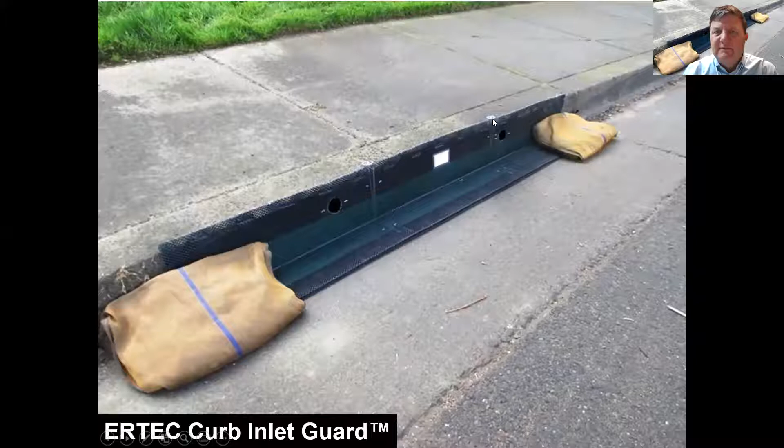Standard installation is going to be 2 gravel bags, and in some scenarios contractors are using adhesive underneath instead, without the gravel bags. The gravel bags have become, around the country, quite an eyesore and a troublesome device because vehicles will drive over them and damage them, and then there's rock all over the place. The 2 holes here are designed for our bypass.

The opening is 1/4 inch. The filter inside, which is the dark part - you can kind of see it's darker - that is 425 microns. All of our products are made out of high density polyethylene, so all your local Coke bottles and milk bottles.

But these can also be overlapped, so if it's a longer curb opening - for example, in Georgia they have much longer curb openings - these can be overlapped. In some scenarios, for example in Arizona, I had a curb opening of 25 feet, so they used about 6 of these. So you can certainly overlap these, and contractors love these because they can put them down and then just stack them right back into their vehicle.

So we can do these in a bundle - a standard bundle is about 25 of these. That's where contractors love the ability to just throw these in the back of their truck and keep moving.

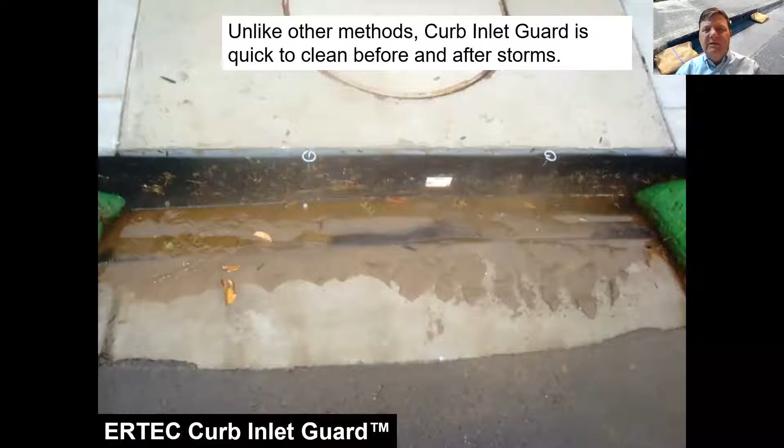Okay, here's the stuff here. This is kind of how it looks in action, if you will. They do have the gravel bags - you'll see everything is collected there. From a maintenance standpoint, we do tell people you want to clean these out, using a flat shovel, a broom, anything like that. Some contractors will take these off, crack them on the ground, clean everything up a little bit, and then put them back in place. So you have quite a few different options for maintenance on these guys.

Now we move into our combo guards - again, a grate in front of a curb opening. We have a variety of sizes for these, everything from 28 by 22s all the way up to 48 by 30s. We can accommodate pretty much every grate in the country with the combo guards and the grate guards, and we can also do custom. We have a contractor in New Mexico who has some really, really big grates - we've gone all the way up to 60 by 60. Now we try to control that a little bit because we don't want it to be bigger than a pallet.

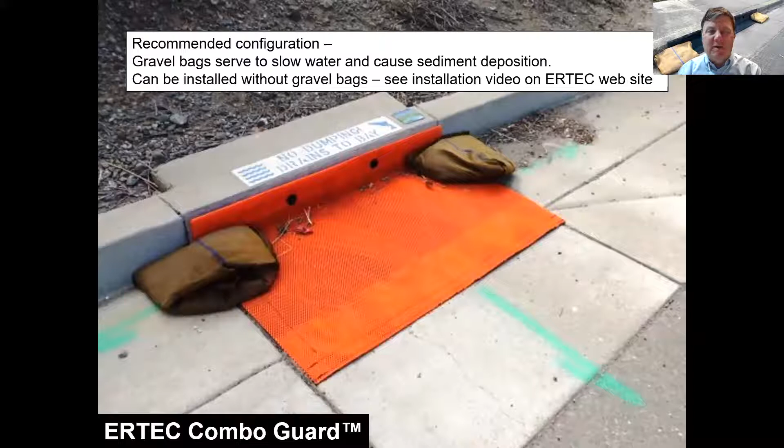Okay, and again, here's the standard installation of a combo guard. You'll see that the filter, the dark part, which is right there - everything from this point forward is open. There's no filter there, and we use that as the bypass, so you have your bypass holes here. This lip is 6 inches tall, and we want to limit the amount of water that's going to sit there, so we want the water to flow. Typical water is going to come this way, not always this way, so we use this as our bypass.

There's a metal rod right here, and that will hold it down a little bit. A lot of contractors now are getting rid of the gravel bags and using adhesive around the edges, and they're going to use rebar tie wire in 4 spots to hold it in place.

Again, from a maintenance standpoint, you are just moving the gravel bags, taking a broom or a shovel or rake, cleaning off the debris, allowing the flow to continue. There's no pooling, no ponding, unless, maintenance is such an important factor in your erosion sediment control. We see horror stories all over the country, I'm sure everybody does, where people just put stuff down and walk away, and then it's just a mess after that.

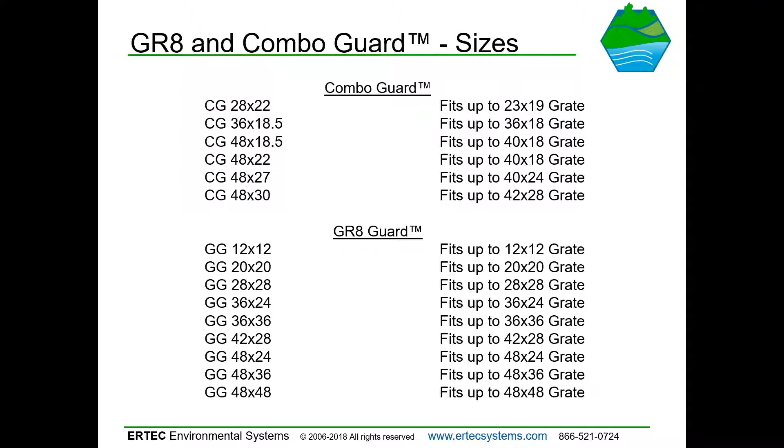Is there a cost difference for orange or black guards? No, but there's a time window. It typically takes us an extra 48 hours to do the black, because our production is orange, so it takes a little time to pull people off those orange ones and move them over to black. But there's no extra cost at all.

Okay, let's move on. This is another product of ours, called our drop guard. Our drop guard is designed for field inlets, unpaved field inlets. Most unpaved field inlets will have a concrete curb around them. This is designed in place of silt fence.

A lot of times people will just put down silt fence around it. We've all experienced the problems with silt fence, where a little wind picks up, a tree or something falls on it, and now it's down on the ground and not really doing its job. With our drop inlet guard, you're able to wood stake it down, and the air and water will flow through our device as opposed to knocking it over.

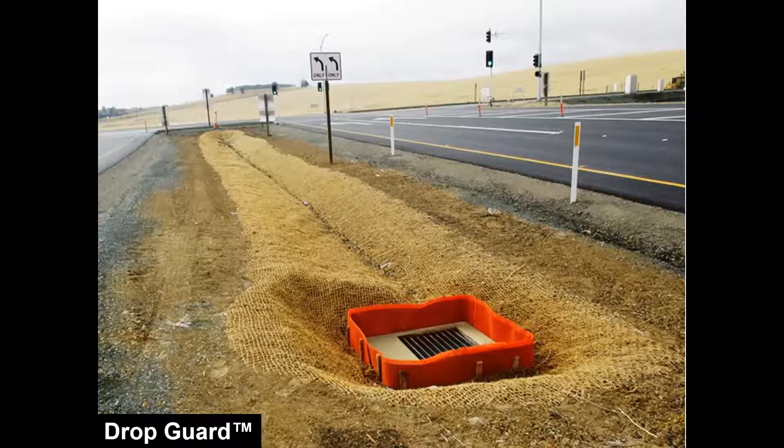Have all these products been approved as alternative BMPs in the state of Georgia? Not in the state of Georgia. The situation is that we have to have our products on a plan, on an upcoming project, prior to construction. Once it's on construction and on the plans, Georgia Soil and Water Commission will go out and review it and test it on site.

Typically, in every surrounding state, it's been submitted. We have conditional approvals in various states in your neck of the woods. I'm out here in California, and all of our products are approved with the California Department of Transportation. We have Nebraska, Iowa, Minnesota, South Dakota, Texas, Florida, North Carolina, Virginia. But yes, they're all in the process, put it that way. So if anybody knows an engineering firm that would like to help me with this, I'd love to connect with you guys.

The other product here is our Slot Guard. This is designed for slot drains. It's become extremely popular because there's not a whole lot of other alternatives out there for slot drains in construction projects. We've noticed that a lot of airport projects are speccing ERTEC Slot Guard for runways. When they're redoing the runways, they have nothing else to cover it. Filter fabric, when they put that down, just gets destroyed and falls apart.

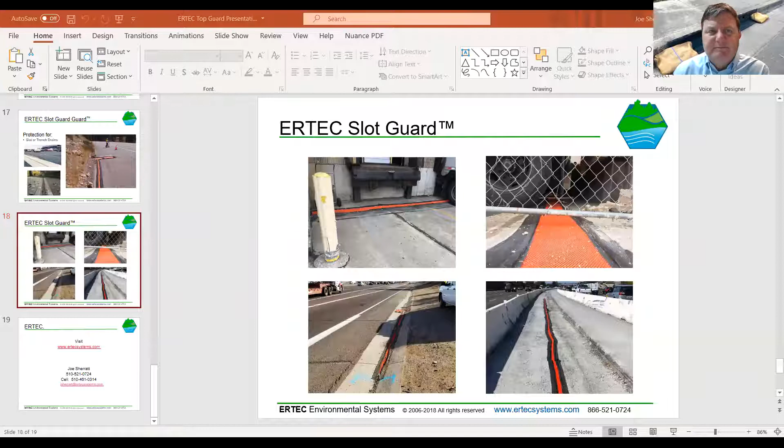I can always send you guys out some samples if anybody's looking at something like this. But this is a great alternative to a straw wattle. It still allows the water to flow through while keeping all the debris and sediment out of your yard, especially in industrial sites.

Okay, I'm gonna message you my email if you could send me some information on that product. Thank you. Okay, that'd be great. And that's Ashley? Yes. Okay, perfect.

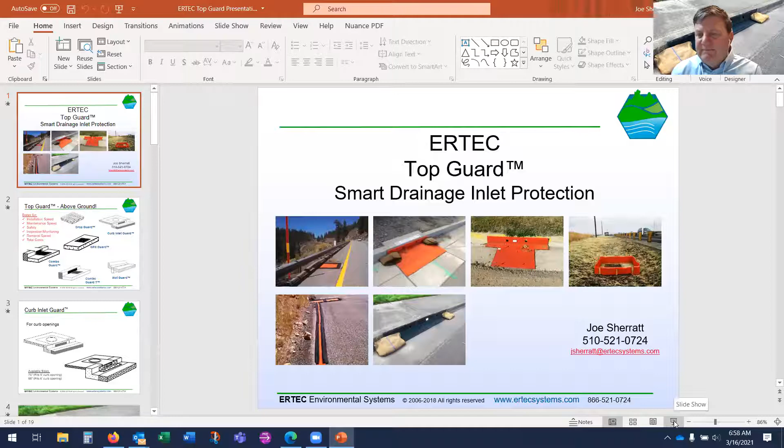Joe, you're still available for questions, correct? I'll be available for questions for a half hour. Okay.

Hey, Joe. Yes, sir. Hey, you mentioned that your grate guards are load rated. Yes. Okay, what type of loads? I know you showed them on the side of a highway. They're rated for even tractor trailer loads.

Yes. The only challenge we face sometimes is there'll be a situation where there might be a grate where heavy traffic, especially larger dump trucks or heavy vehicles, will be turning. So if their wheels happen to be turning right on it, that sometimes is a little bit of a challenge for us. But there was a pretty major project in Arizona, and they used our grate guards right outside of the yard where all of their material was loading, and so they were driving over them nonstop. We had no problem with that.

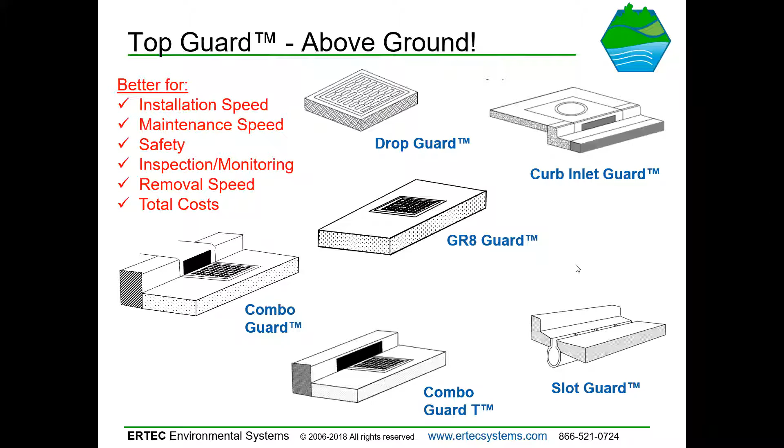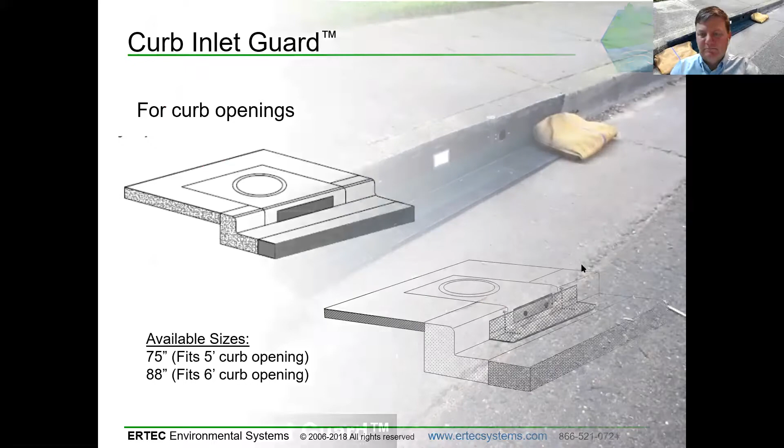Can you provide your direct email? Yeah, let's see. Not that one. So here's all my contact information. I can go all the way to the, might be easier the last one.

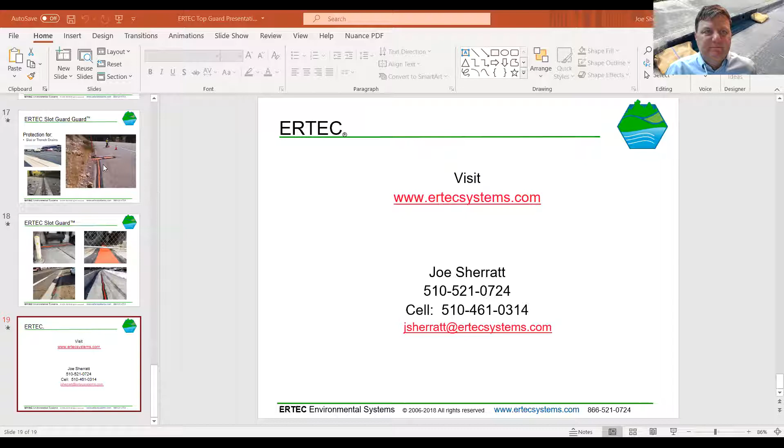So if anybody has any questions or they'd like any information sent to them or samples or anything like that, I can shoot that over to you. So what's everybody using now for recommended inlet protection? Is anybody-

I didn't quite get that email address. Oh, okay. Ashley, what is your email address? It's A Taylor. And I did direct message it via the chat. Oh, you did? Okay, so let me check. Let me make sure I get there here.

Ah, got it. Okay. And I'm most interested in the grate guards and that last product, that perimeter product, the hard surface guard, for an industrial application. So if you could just shoot me an email, I'll be in touch regarding that. Okay, perfect. All right, thank you. Thank you.

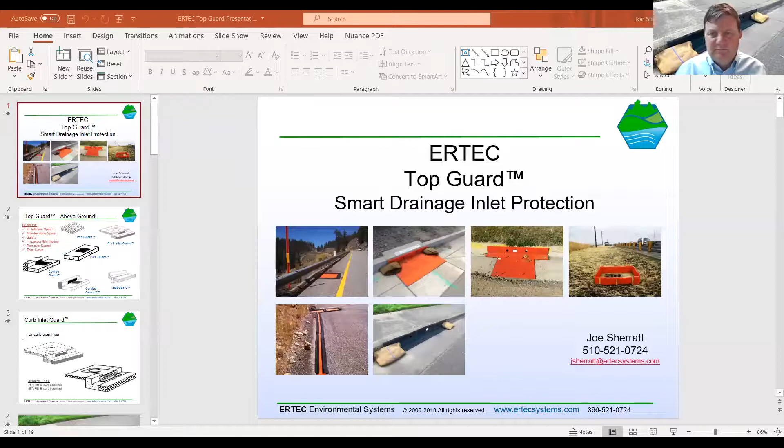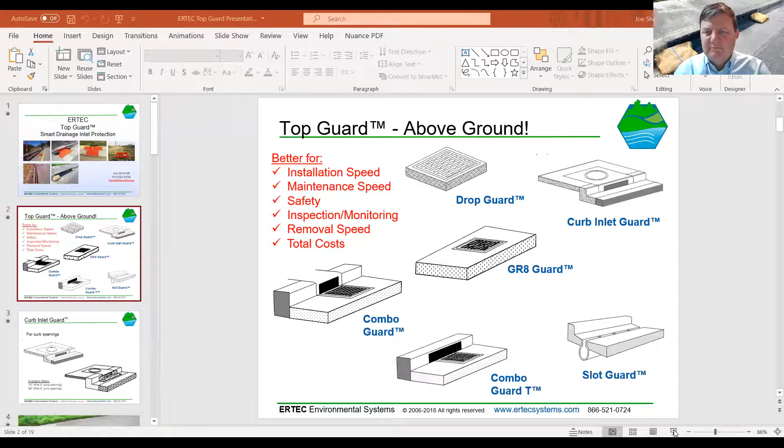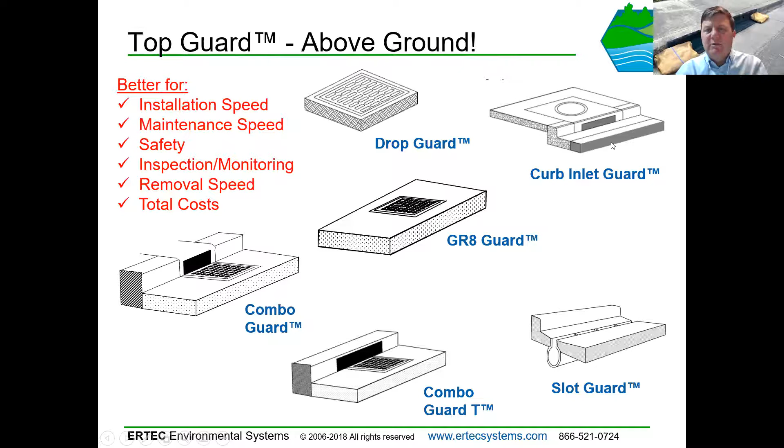Why are we doing the loop? So we have a variety of... let me get onto the other screen here. This one's that's the better one. Variety of different applications, everything from a flat grate to a combination of grate and curb opening. Slot drain, always an interesting one to try to cover that. We're back onto the loop, I apologize.

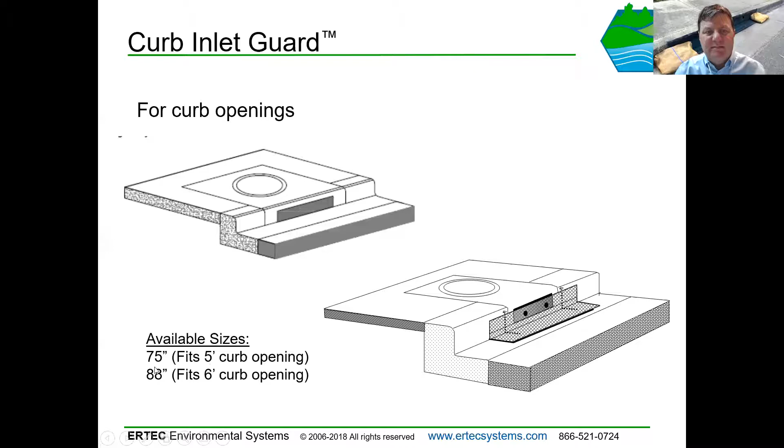This is our curb opening. This is our curb inlet guard, 75 inches long, 6 inches tall. What we have is we've got some pins that will hold on top. They adjust based upon the height of the curb. Standard installation is going to be with gravel bags. A lot more people are using adhesive in place of the gravel bag because of the challenges faced with the gravel bags, getting run over and damaged.

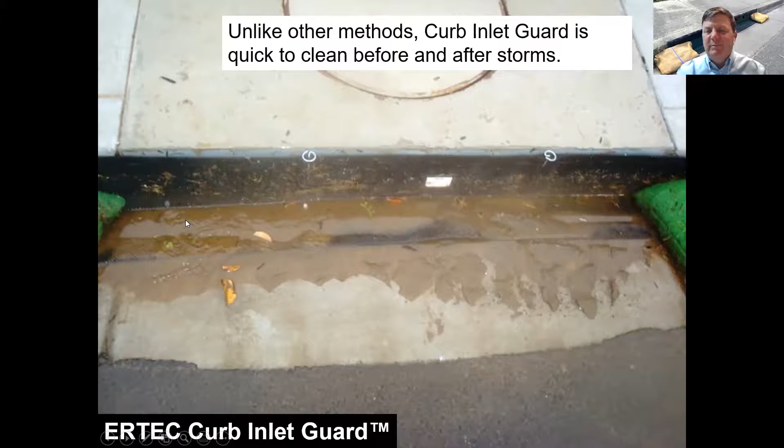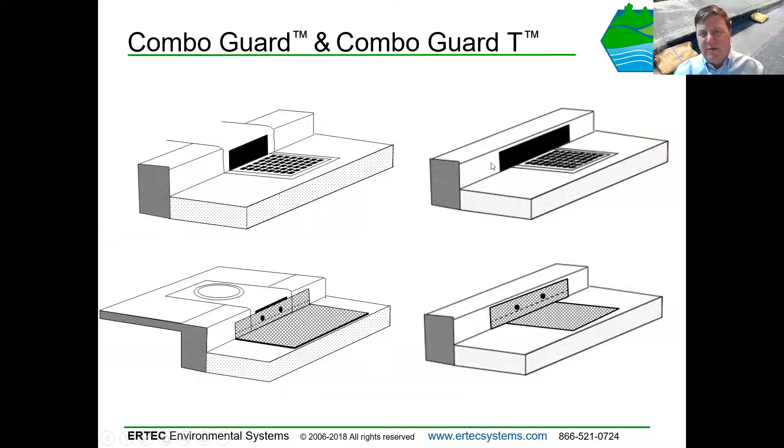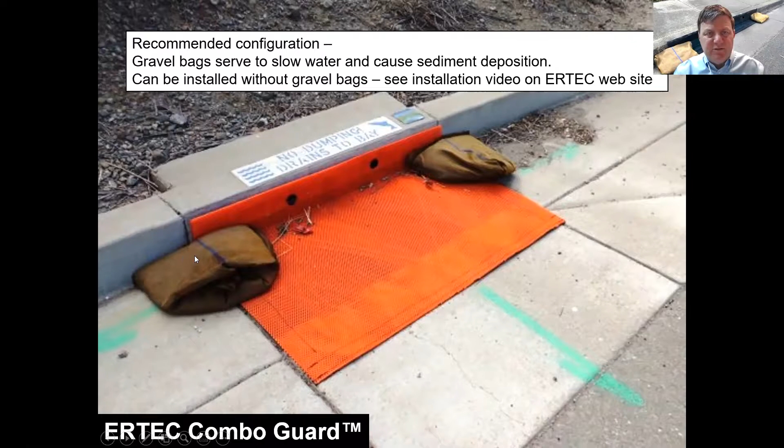Now we move on to our combo guards, which would be a grate and curb opening. In some parts of the country, the curb opening is much bigger, so we have our bypass holes here. We have our filter, as you can see the dark sections here. Our bypass is also here. Installation is going to be with 2 gravel bags. Here's an example of a completely messy one, but again, it will be very easy to clean for one person. One person will be able to roll through there with a flat shovel or a broom and clean all of this up, and you will not have to lift up a grate once.

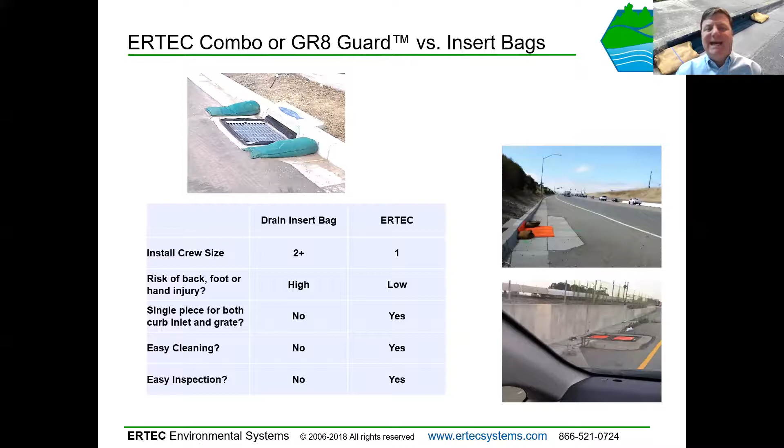Some of the challenges that you face with a traditional bag: typically it's like 2 people, risk is very high, and the reusability factor is very low. All of our products are reusable, so you'll be able to reuse all of these.

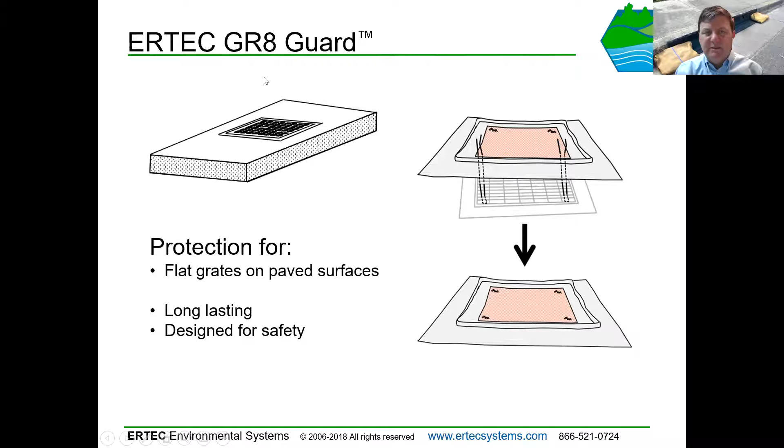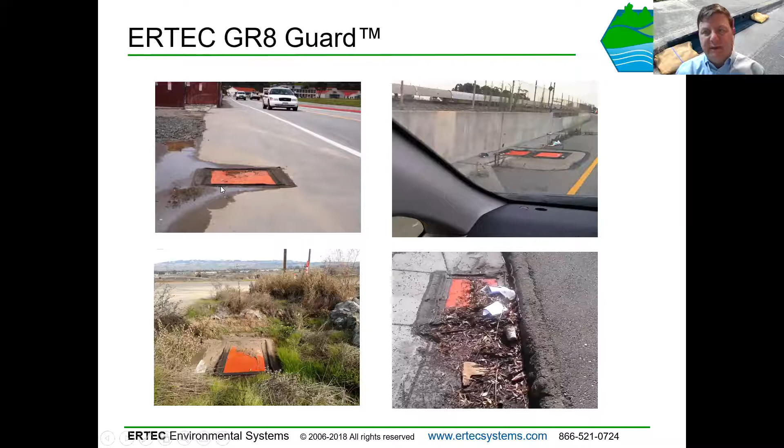Here's our GR8 Guard, flat grates, with a variety of different sizes available. Typical installation uses rebar tie wire on all 4 corners. In high traffic, high flow areas, we like to use adhesive to hold it down a little better. We do get some air bursts, especially on the sides of highways.

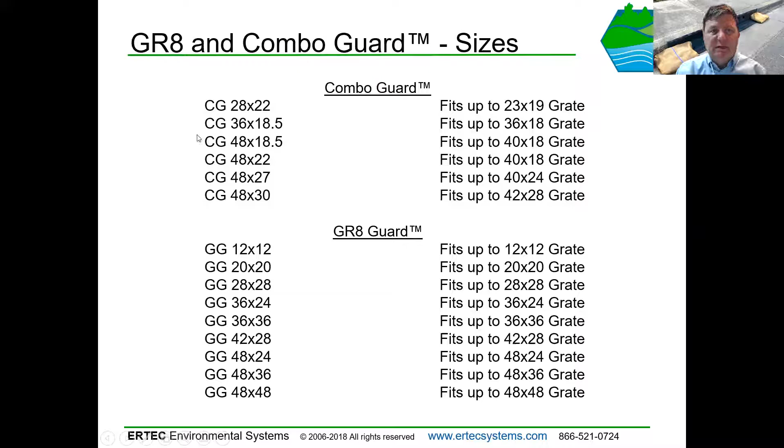As you can see, there's a variety of sizes available. We can also do custom sizes, and we can also do these in black. Some of the business parks prefer black. This is our drop inlet.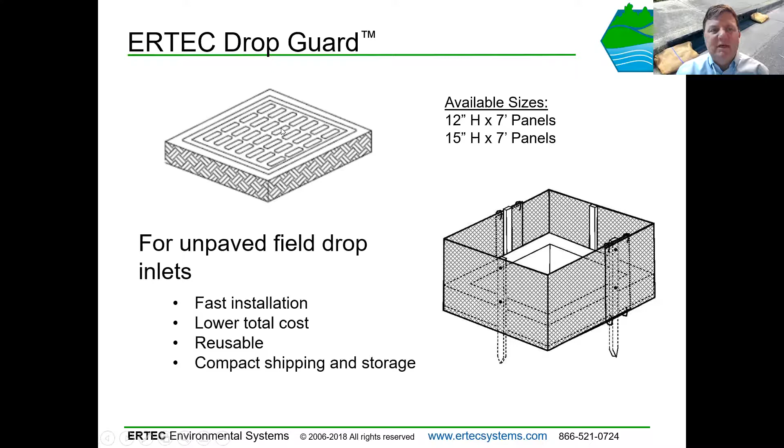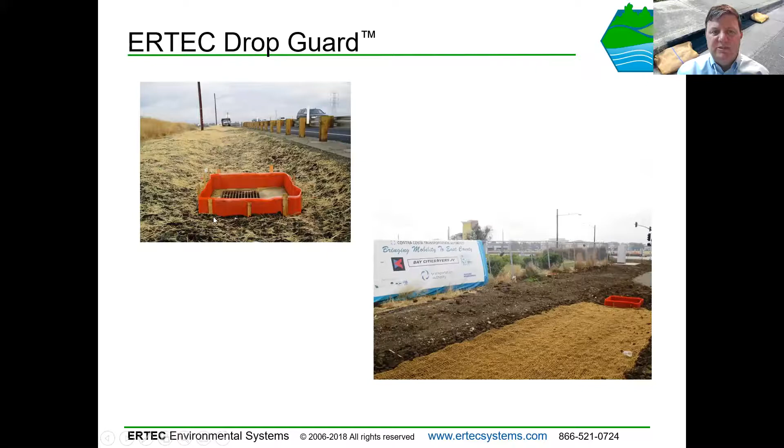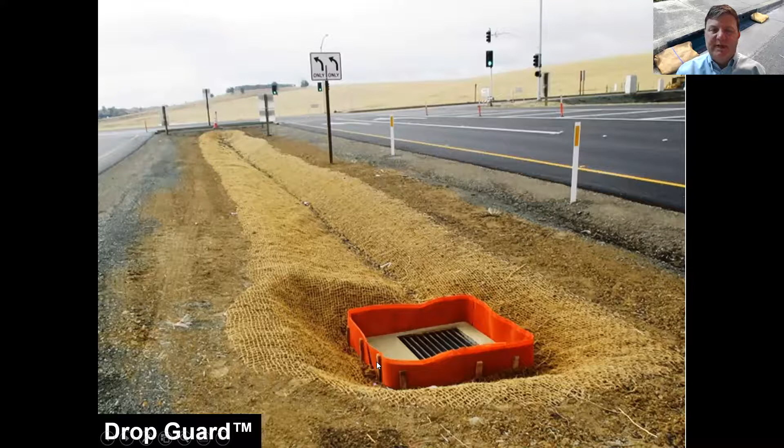This is designed for a field, unpaved inlet. These come in 7-foot lengths, everything from 12 inches to 15 inches tall. Typical installation is trenched down no more than 2 inches. It's much more durable than a silt fence, which is a real common installation for this type of application, because that will just come tumbling down for various reasons, but these will hold up.

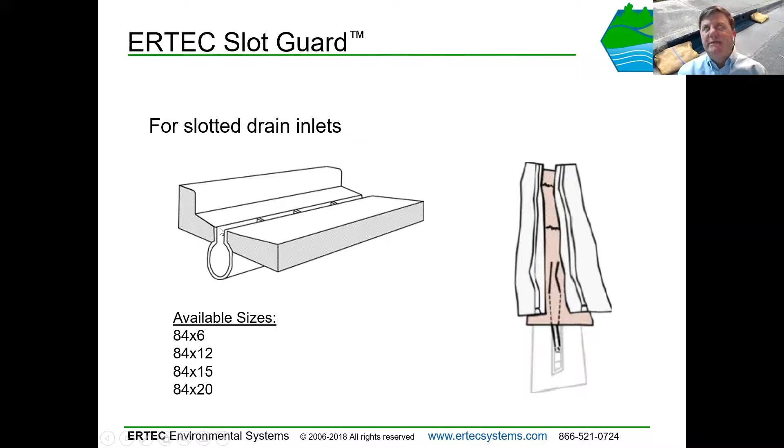This is our Slot Guard, which is designed for any type of parking lot or loading dock, very common on industrial sites. Here's a couple applications. This was a Lowe's construction store parking lot. This one is residential — not too many of these are needed.

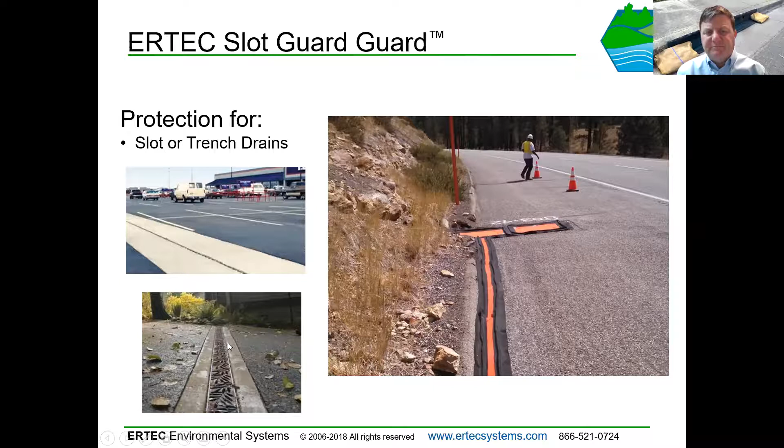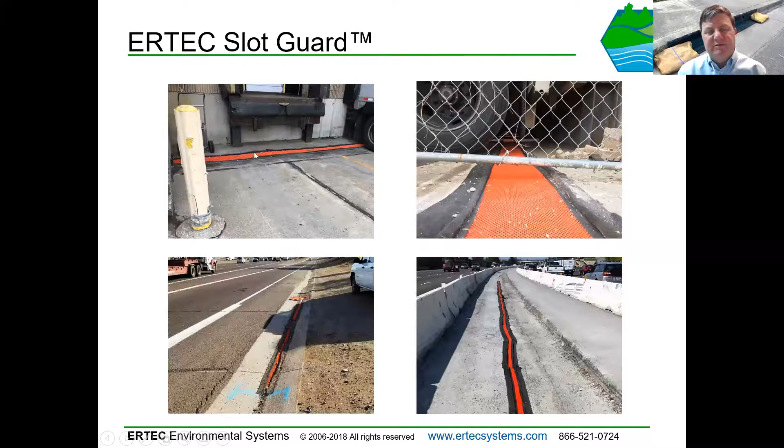This is a perfect example of a highway project. Here's our loading dock that's always getting flooded. Now what they'll be able to do here is collect all the debris, all the sediment, everything there. They'll be able to pull that off, and then the water will flow and it will not flood.

And that is it. Let me get back to the regular one. Are there any new questions that might be out there?

This is Glenn, I've got one. Yes, sir. Did you guys have to get on an approved products list, or are these products exempted from that, or how does that work?

In the state of Georgia, the process is that to get approved, to be reviewed, the products need to be on the plans of an upcoming project. Once the products are on the plans of an upcoming project, we will then send the product out to the site, where they'll be installed. The Georgia Soil and Water Conservation Commission will then send a team to review the project and make sure they're doing their job.

Now, I've reached out to a couple home builders that use them, and they worked great — they just were not approved. Like I said earlier, Georgia Graham Packaging, there's a couple Graham Packaging sites that have used our Grate Guards. That's a private situation there, so they're able to use those.